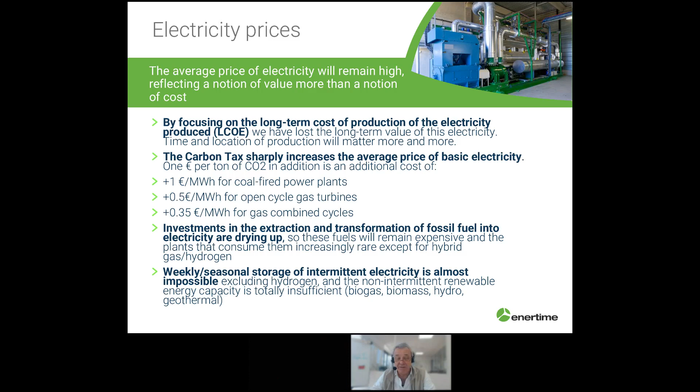A good example is the California duck curve. Maybe some of you know about it. It was forecast in 2012 in California that the more you support solar electricity production on households or for self-consumption, the more you will decrease the need for electricity during this period. And if there is less need for electricity between around 8 o'clock in the morning and 5 o'clock in the evening, the price of electricity during this period will have to go down to allow everybody to be able to produce and dispatch its electricity.

Meaning that the more solar comes into the grid, the less the price of solar can be expected during this period — this period will be when electricity can be transformed into hydrogen, because this electricity will be dirt cheap. We will certainly see a big variation in the price of electricity between day and night. We are already seeing that on the European grid and the Californian grid, and it will be more and more pronounced. What's interesting is that this forecast from 2012 has been found to be even optimistic, because the reality shows an even more pronounced reduction of consumption around 10, 12, or 1 o'clock during the day, for a typical month in 2020.

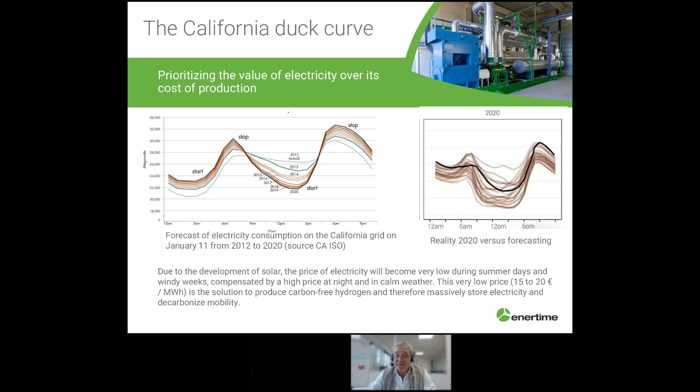So we believe that saving electricity is a main issue, because the consumption of electricity in 30 years' time, for example in France, is expected to be around 50% higher than it is today. At the same time, the projection is to try to reduce global energy consumption by 40% in France. In Belgium, if you look at electricity only, it's expected that production of electricity will have to double between now and 2050.

So electricity is in need and will be scarce because of this huge increase in electricity consumption. We expect that the price of electricity will remain on average relatively high, with very significant differences in price between daily and night production, and between summer and winter. This difference in price will be fully related to intermittency, meaning the more intermittent electricity you have on the grid, the more the price will vary between different times during the year.

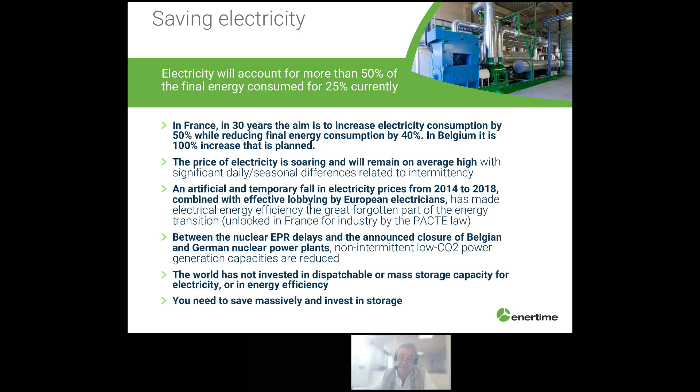To be very clear, the world has not invested enough in dispatchable or mass storage capacity for electricity, or in energy efficiency. We need to save massively and invest in storage. This is what we believe will drive the business of Enertime in the coming years.

Now, just to look at our storage of electricity - sorry, a few words are still in French, but I think you will understand the rest of the slide.

Hydrogen is, for us, possibly the only long-term massive storage means for electricity. Why? Because electric batteries are not there to store electricity for further use - they're just there to regulate the grid.

We are not going to be able to save massive amounts of electricity for more than a few hours during the day with traditional batteries. And the more you have intermittent wind or solar energy, the more, even if battery capacity increases, it will just be for arbitrage - meaning you can move the time when you consume electricity, but just by a few hours, or just to stabilize the grid.

The other solution is pumped storage power plants, and we do not believe that pumped storage power plants can really increase capacity in Europe today in a significant manner.

Pumped storage power plants use a huge amount of land and flood a huge amount of land when you have to create the upper and lower reservoirs. You may use some mines, you may use some existing hydroelectric power plants, but it will be difficult to really significantly increase pumped storage capacity in Europe.

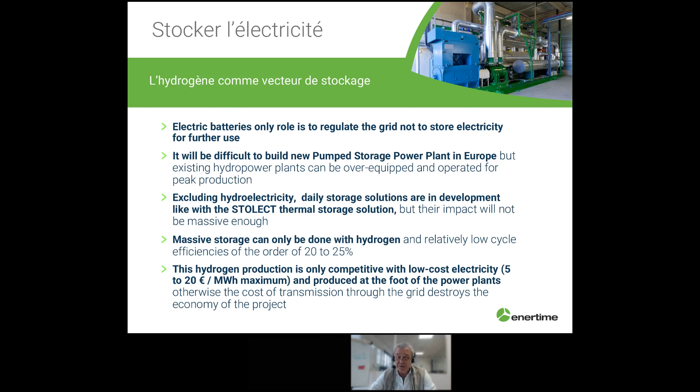Intermittency does not affect every country in the same way. If you look at France, intermittency is not a big deal today on the French grid. It's maybe an extreme case, but let's say at the beginning of the year in January, if you compare the production of electricity using solar and wind to the production of electricity from other sources, you see that only a very minimal part was produced with solar and wind.

On a peak basis, at the highest illumination time of a day in January, you may have something like less than 10% of the electricity produced from wind and solar, and we are only speaking about peak power. If you speak about kilowatt hours, it's even much less.

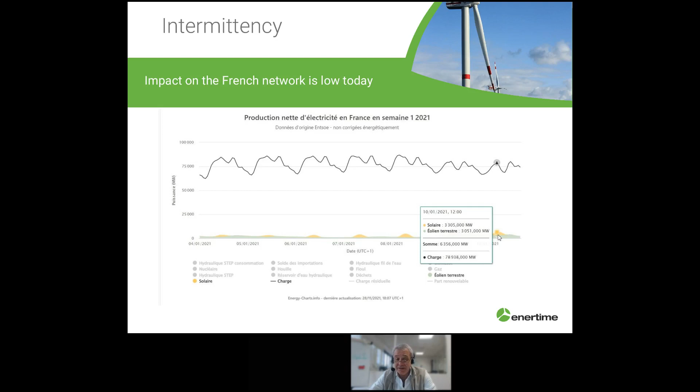These 12 gigawatts tomorrow will not be so easy to sell outside of Germany, because whether it's France, Denmark, the Netherlands, or other neighboring countries, they will have the same issue with high solar and high wind power production. Because everybody will produce a lot of electricity at the same time, there is an absolute need to store all this electricity on a massive basis, meaning with hydrogen.

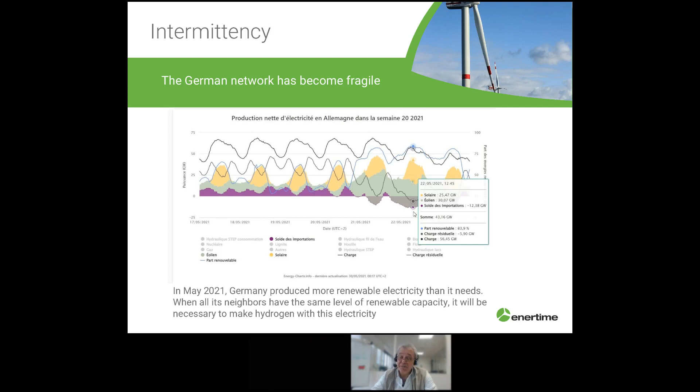So today, it seems like there is no problem, because you can easily use existing power plants, fossil fuel or nuclear, on a variable production basis. But this will not last. Sooner or later, we will have to either shut down solar and wind or store the electricity from solar or wind. And when we do that, we will be able to produce hydrogen.

So, a few words on Enertime. Enertime is a relatively old company now, created in 2008, and we've been on the Paris Stock Exchange since 2016. We have recently decided on a strategic move to create an ESCO subsidiary named Energie Circulaire, in English, Circular Energy. This company is going to have a significant impact on the future of Enertime and the future of energy efficiency worldwide.

We are still spending a lot on R&D, and very recently, in fact yesterday, we announced that we will go for a hydrogen compression technology, meaning that we now have 4 technologies to develop and sell on the market: the ORC system for making electricity out of heat, a heat pump to produce high temperature heat from low temperature heat, gas expansion to recover the energy of expansion in the natural gas grid to produce electricity and cold, and lastly the new development, hydrogen compression, compressing hydrogen at very high pressure.

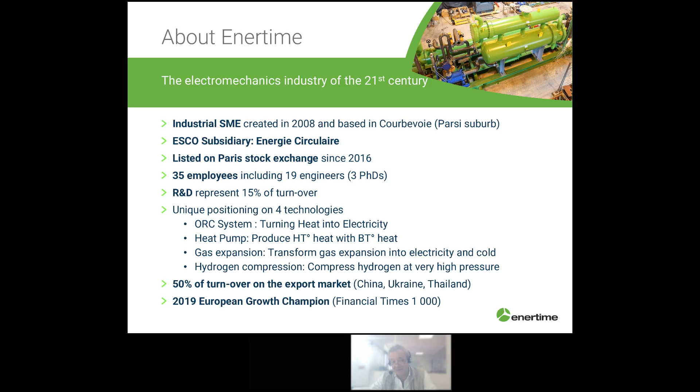Lastly, we have been selected in 2019 as a European Growth Champion. Unfortunately, because of the very low price of energy that came in 2016, 2017, we have not been able to replicate this success in 2020 and 2021. But we are very confident for 2022 and more.

Our main market today is to attack the waste heat recovery market in Europe and worldwide using our ORC technology. This waste heat market is relatively huge. Only in Europe, you have around 450 terawatt hours of waste heat per year above 100 degrees, and around 50 terawatt hours in France alone. This waste heat above 100 degrees is our target. In Europe, we consider France, Germany, Italy, Spain, Poland, and UK as very good targets for our ORC application, and outside Europe, Turkey.

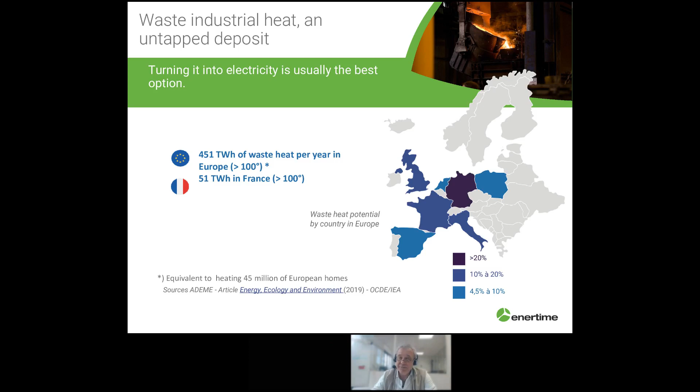The ORC technology, in a few words - I think ORC stands for organic Rankine cycle - is the Rankine cycle, like the steam Rankine cycle of a thermal power plant, but instead of using water, we use refrigerant or hydrocarbon like alkane or CO2, in a closed loop cycle, producing electricity out of the expansion of a fluid, the vapor of the fluid. We don't offer a steam cycle, we only offer an organic cycle, where we mainly use alkane.

So turning waste heat into electricity is the right solution. It reduces the consumption of non-intermittent electricity by directly reducing the consumption of large industries. Non-intermittent, CO2-free electricity is very difficult to produce, so any solution that can produce CO2-free electricity on a permanent basis has to be favored. That's why ORC will be favored.

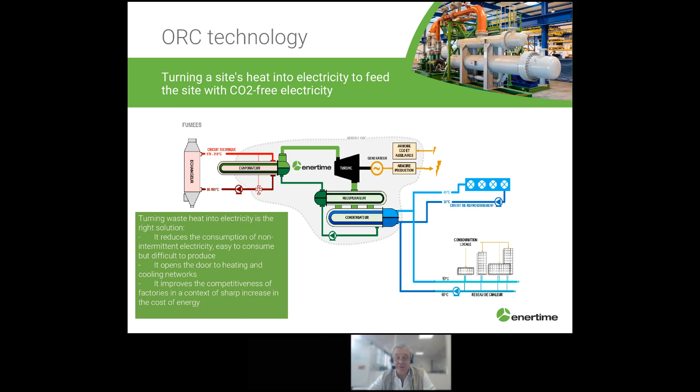A few words on our future. We had, as explained, a few difficult years because of the low price of electricity on the grid. We expect these few years are now in the past and will remain in the past forever, or maybe not forever, but for a long time. We believe in very strong growth in the coming years, 2022 and 2023, where all the projects we have in our pipeline will be delivered.

Our company had negative results in the past years because of the lack of turnover, not because our projects were not profitable. Each project was profitable, but we did not have enough orders to reach the break-even level. This load, we expect to get very soon. At least in 2023, our objective is to be profitable.

One of the major moves we have done in the last two years, a very strategic move that was decided before COVID-19 appeared and has been implemented, maybe with a little bit more difficulty, but purely on time and ready to take up the challenge of the industry of the 21st century, which is energy efficiency. Energie Circulaire is a subsidiary we created 1.5 years ago.

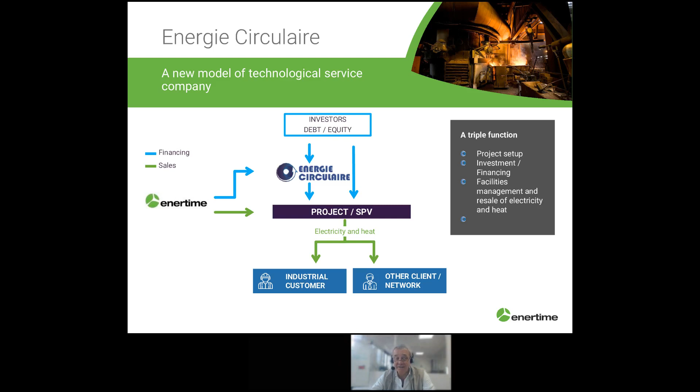So, a few words on ORC. There are different companies offering ORC, but we have focused ourselves on high power ORC. We believe that this is a market where we have some edge and where Enertime, offering turnkey solutions, will be a leader on the worldwide market.

We are not interested in all kinds of heat and all kinds of industries, and we now focus on very specific niche markets that are, of course, global, including binary geothermal. That is a very interesting market for us, working on existing geothermal plants to increase their efficiency with ORC, and a few energy-intensive businesses like steel, cement, glass, metal industry, chemical and petrochemical, but still wondering whether this industry is a very profitable market, but clearly diesel and gas engines and gas turbines.

Other industries like paper or food are not a target for ORC and never will be, because most of the waste heat is not at the right temperature. ORC requires relatively high temperature to be cost effective.

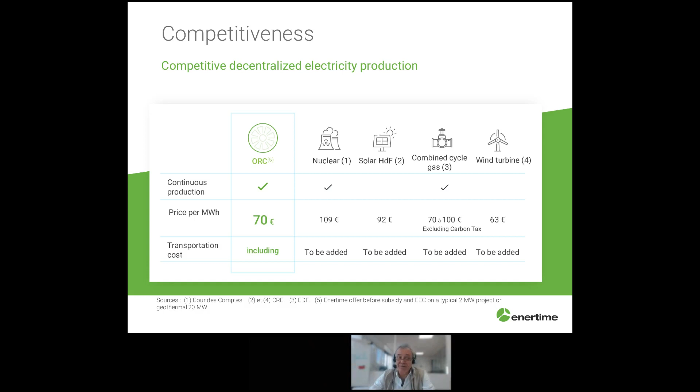Competition in large ORC is limited. We have today 3 competitors, and the real competitor we face in most of our projects is Turboden. But neither Turboden nor the other companies, except maybe for geothermal, Ormat, is offering their machine as a service. Enertime has decided to make this ESCO offer one of their key strategic proposals for the industries, and we have seen this type of solution very much appreciated by the market.

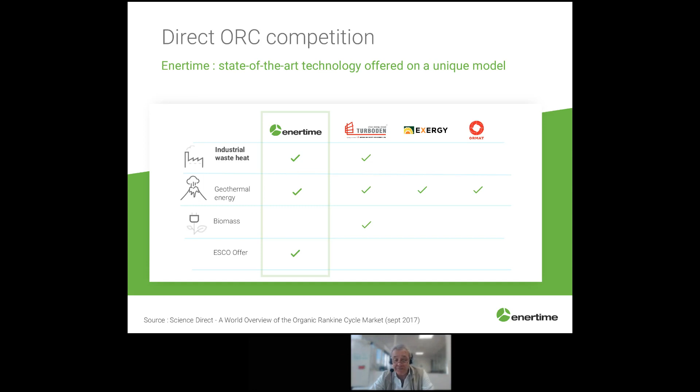Just a few words on what happened on the French market over the last years. We have seen a lot of energy efficiency and decarbonization projects launched and supported by ADEME, the French Agency for Energy Efficiency. And out of these around 130, 140 projects, very few, in fact, were really of an ESCO type. Most of them were direct investment from the industrialists that received subsidies to improve their process.

Only around 12% were on an ESCO basis, and out of these 12%, only 2 technologies have been really promoted on this basis: the ORC and biomass heat.

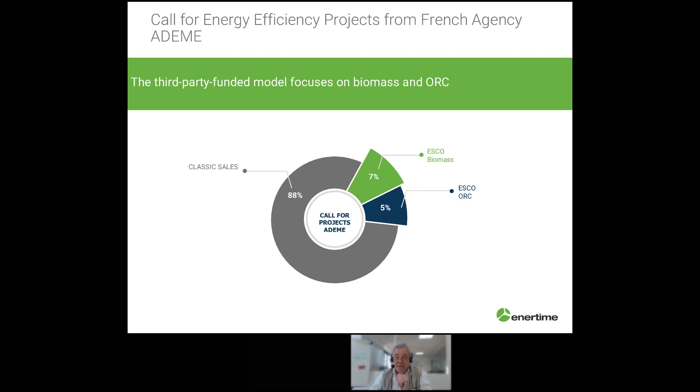Biomass heat is one of the ways to decarbonize the industry by producing heat out of combustion of biomass. This requires some strong knowledge of the biomass market. So that's why ESCO companies have been very active on this. Otherwise, ORC is the other solution that was really deployed on an ESCO basis.

Now, if we remove the biomass projects and we go only on energy efficiency and not on decarbonization, we see today a big part of the projects are just heat recovery. A significant part is ORC, with around 14% of all the projects being ORC. Out of these 14%, Enertime secured half of the projects, or 7%, meaning 3 projects.

Out of the 3 other projects that were selected, one was for Engie Group, one for EDF Group, and one for Aeon. So we can clearly see that our offer is in line with what the market is expecting, and we are going to grow big as a provider of solutions.

We do not see today existing players on the ESCO market to be as strong on the ORC business as we are. So we are very confident that in the future, the ORC technology will spread all over Europe, and the good model is energy efficiency as a service.

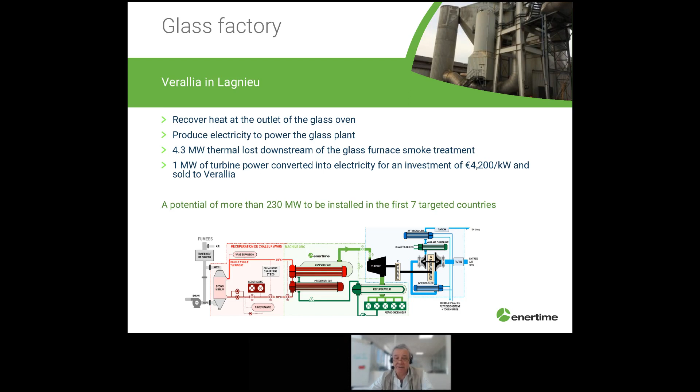The first example is this Verallia project in the north of Lyon. It's a container glass factory. We decided at the beginning to offer compressed air as a service using waste heat, and now the project has changed to electricity production for the site. We expect to finalize the contract within a few months. It will reduce by 1 megawatt the consumption of the factory.

A second project, much bigger, is an arc furnace producing ferro alloy. It has 22 megawatts to be recovered in a boiler that will burn syngas generated by the arc furnace. We expect to install around 5 megawatts of electricity production for an investment of around 2.5 million per megawatt.

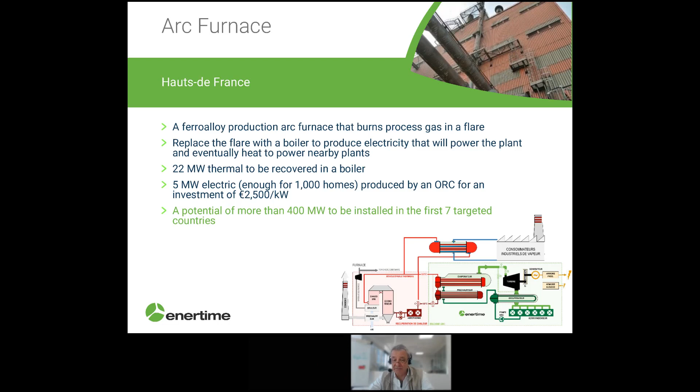This type of application is quite interesting because of the size and the economic benefit of such a project, and we expect that all arc furnaces of this type will in the future be equipped with ORC.

A zinc recycling oven, also in the north of France. It's using a furnace to melt and recycle zinc from automotive scrap metal. We will install an ORC at the outlet of a catalytic oxidation system that destroys the volatile compounds that you can find in such scrap metal and cannot be released into the atmosphere as such.

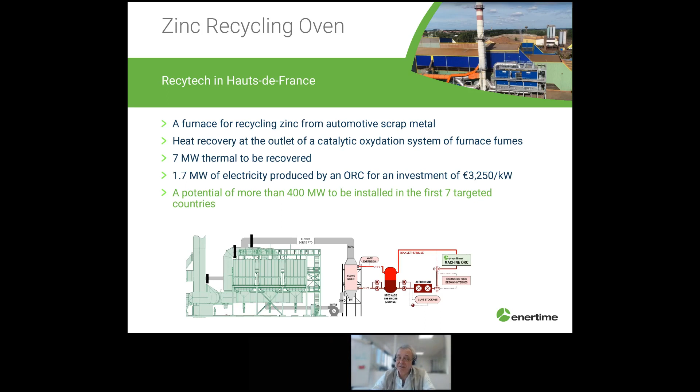Now, a quick view on the market. First, the European market. We have tried to pin down the potential of ORC in the major energy-intensive businesses where we believe that there is a potential for ORC. And you can see here the different countries with the different capacity that could be installed.

We see that the Turkish market is the number one market by far, and we are strongly focusing on Turkish customers and offering our solution to the container glass, flat glass, cement, and steel industries in Turkey.

We work, of course, in France. We are now entering Germany, Spain, and Italy to offer the same kind of services, and we'll be very happy to discuss with the UK and Polish customers that are the other targets of the company.

Just for the sake of illustrating this potential, each figure represents 1 megawatt of ORC capacity. It's a theoretical potential, but just to see what could be the extent in the rest of the world, most probably we expect that worldwide there could be 4 or 5 times more capacity than we have here on the European market. So we expect that the market for ORC-based energy efficiency is huge.

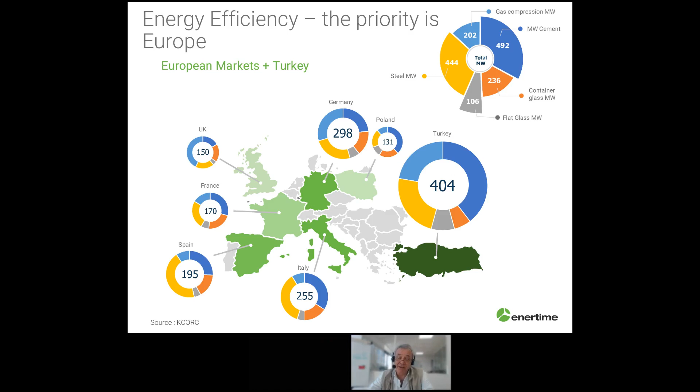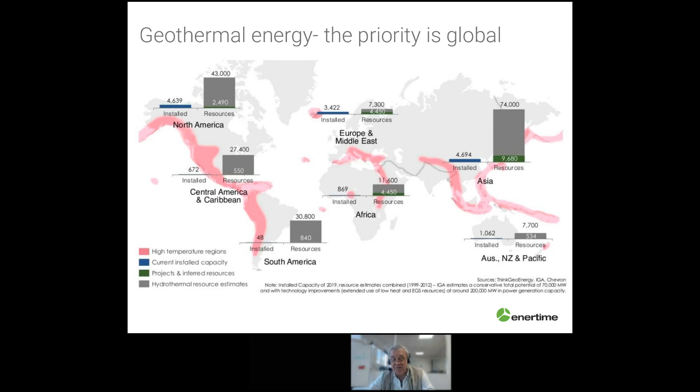The other market, of course, is geothermal. Geothermal energy is the mother of the market for ORC. This is where especially Ormat, that is a very great and biggest manufacturer of ORC, has started really to expand, and we believe that geothermal will have a big future, and ORC in geothermal will have a big future. We are less focusing on this market today, waiting to grow bigger. When we will be bigger, this will be a very important market for us.

Hydrogen. As explained at the beginning of the presentation, we believe that hydrogen will be a key to secure non-intermittent production of electricity worldwide and provide a CO2-free solution for the mobility. We believe that hydrogen will be produced by excess cheap green electricity using solar and wind potential, and low cost of electricity coming from the excess of electricity on the European grid, or very low cost of production in the southern part of Europe, or in Africa, or in countries where there is a very high solar potential.

We believe that this hydrogen has to be stored for at least a few hours, and it has to be stored also to use it on the mobility solution: trucks, planes, ships. Some other solutions may be available, like producing methanol out of CO2 and hydrogen, or reproducing natural gas using hydrogen and the CO2 of the atmosphere. But whatever solution is used, storage of hydrogen will be a big issue.

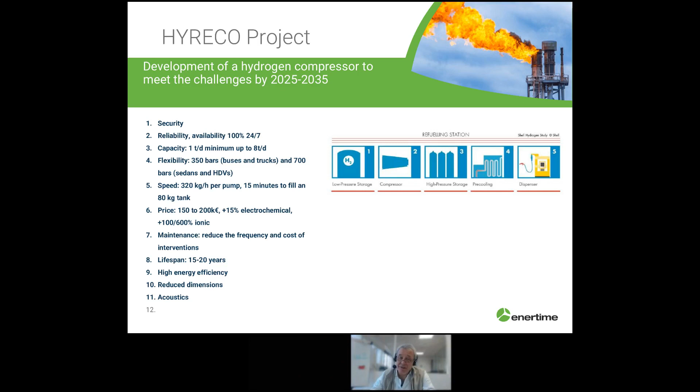We consider that there is a market for a good solution that will fulfill the high capacity market, which is above 2 tons per day, or around 300 kilograms per hour. And we are focusing on this large compression capacity market. As explained before, we believe that hydrogen and energy efficiency and geothermal energy are very interlinked, and that our ambition to become a major electromechanical industrialist for the transition to a CO2-free energy requires that we are also active on the hydrogen market.

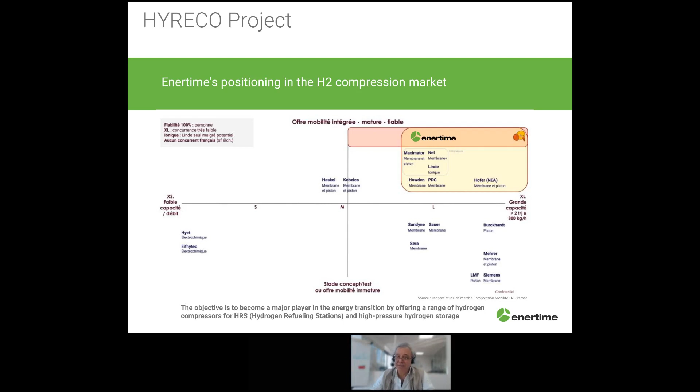So, a few of the reasons why we have decided to launch this hydrogen compression development: first, we feel that there are a lot of refilling station suppliers in France or in Europe, but not so many compressor manufacturers. And we feel that we are plugging a gap because compression of hydrogen is one of the key issues for the future use of hydrogen. We believe that the existing technology does not meet the challenge for this huge development of hydrogen worldwide, and we feel that new players have to step in.

The technologies of compression are already mature technologies, but hydrogen may need new solutions that are not necessarily offered by traditional compressor manufacturers. We believe also that for large stations, there is a lack of suppliers. There may be a lot of suppliers for smaller scale solutions, but not so much for large solutions. We have a capacity to develop turbomachines and mechanical equipment for flammable or explosive conditions, and we want to use this capacity to expand into this very promising market.

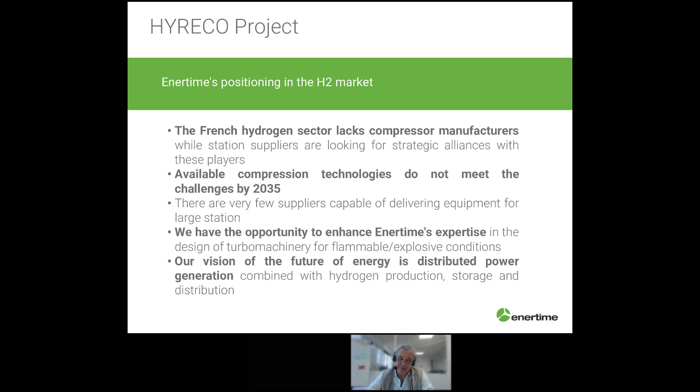So the economical challenge in mobility is to produce hydrogen at around 7 to 8 euros per kilogram at the pump for a full tank of a vehicle. If you compare with the cost of gray hydrogen produced at 2 euros per kilogram, you're of course at a much higher price. But if you compare with the cost of a full tank for diesel or gas, at that price hydrogen is competitive.

On the other side, we believe that the future of gray hydrogen is not very great. It's very much dependent on the price of gas and the carbon taxes. Therefore we feel it's not necessary to reach the gray hydrogen production costs to have a solution for the future of the carbon-free economy.

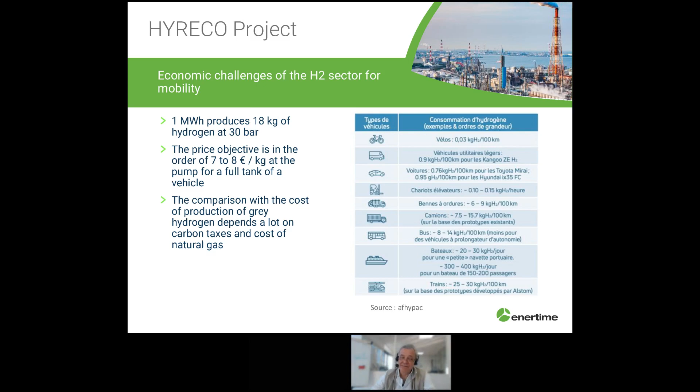The other market we see as very promising is producing electricity with hydrogen on a dispatchable solution, meaning developing power plants that run on hydrogen stored and produced when electricity is at low price, and releasing this energy when electricity is at a high price. In particular, we feel that all the manufacturers of gas turbines and gas engines are now working on shifting from natural gas to hydrogen, and we see that as a clear message that hydrogen will be a good solution for producing non-intermittent electricity at the time when the grid will need it.

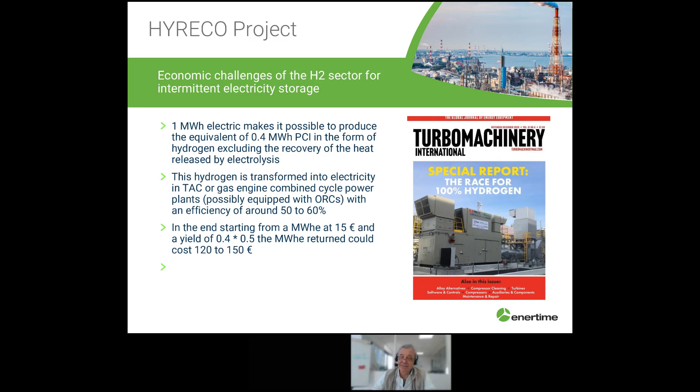This equity line is a very good solution for guaranteeing that we always have the capacity to move on. We do not want to use this line, and will make all necessary effort to avoid using it, but we see it as a very strong tool to show that we have the capacity to move on and to finance our development. We may use this line or may not. We have today no reason to use it in the near future.

On the Energie Circulaire side, we have contacted and contracted with an investment bank to find capital for Energie Circulaire and the SPV, and we expect that within a few months we will have built a complete financing scheme for Energie Circulaire and the SPV that Energie Circulaire is creating and developing to finance our ORC project.